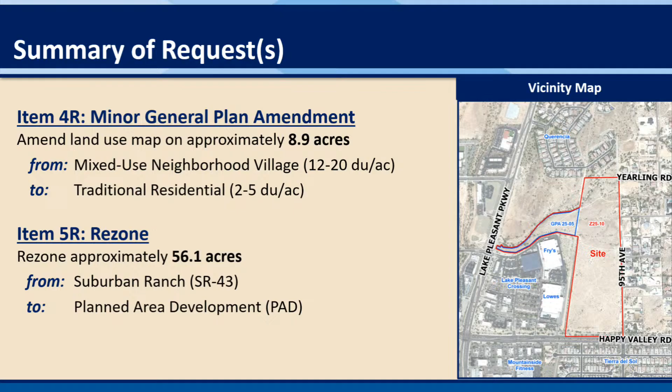If we dive a little deeper into the area context, we see that the site is located at the east portion of what's known as the Four Corners, at the intersection of Lake Pleasant Parkway and Happy Valley Road. Those 4 corners at that intersection also all happen to contain commercial uses.

The subject site is located behind that commercial center, Lake Pleasant Crossing, and is also nestled between residential uses to the north, east, and as you continue south beyond Happy Valley Road. Other items to take into consideration for this area context: there is a mix of density surrounding the site, which ranges greatly from 1 to over 20 dwelling units per acre, as well as commercial uses. Being in the midst of all of that, the subject site is a prime example of what is known as an infill development or an infill lot, because it's between all those variety of uses.

As mentioned earlier, this site was formerly owned by the Arizona State Land Department. It was auctioned off as a greater 72.7 acre site last year, and we'll see that in the next slide. One other constraint we'll also see is that there's an existing wash and a 60-foot wide gas line easement, but the next slide will have the depiction and the graphic.

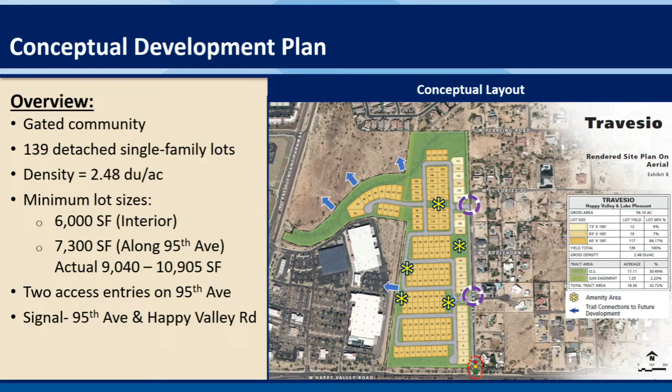There will be 2 access points to get to the site, both off of 95th Avenue. There will also be signal modifications at the intersection of Happy Valley Road, such as a chamfer and relocation of equipment, associated with road widening and the new geometry of the street.

Although the interior lots would allow for 1- and 2-story homes, those larger lots on 95th Avenue are going to have a 25-foot, single-story height restriction.

The proposed planned community is also going to provide over 18 acres of open space, approximately 33% of the site. That's more than double the required open space.

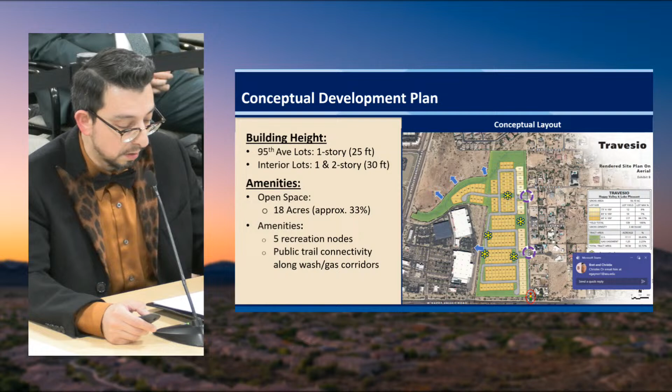Public access trails are being proposed to connect the development to the surrounding neighborhoods, amenities, and commercial uses. We see 5 recreation nodes, marked by bright yellow asterisks, that will be placed strategically around the development to serve the residents there.

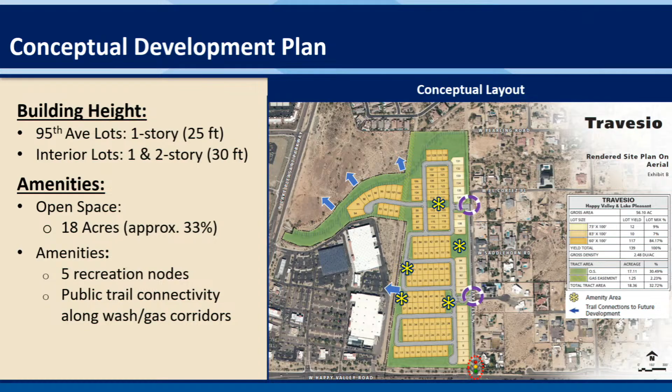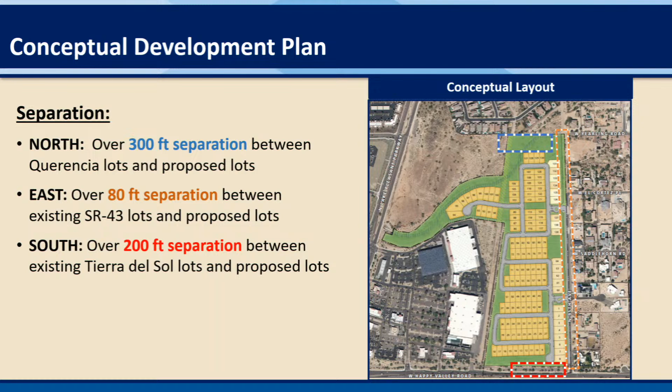The way the lots are laid out demonstrates physical separation from the adjacent neighborhoods. On the east, there will be 80 feet of separation from lot to lot. There will be more than 200 feet of separation from the lots at Tierra del Sol on the south, and over 300 feet to Querencia lots on the north.

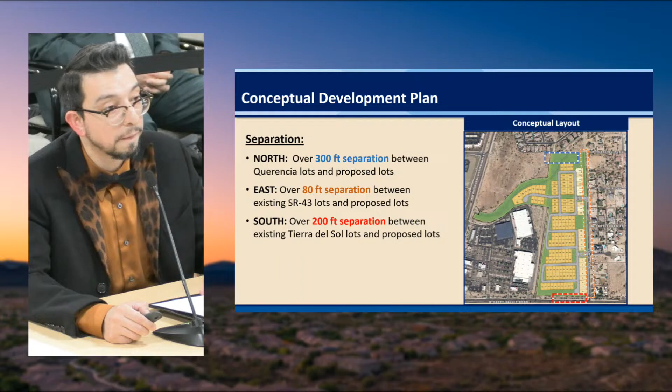Now that we have a general idea of what is being proposed, let's get into staff's analysis of the requests.

As a reminder, we are evaluating 2 different proposals tonight, but the first proposal is only for that 8.9 acre elephant trunk portion, where you see the green line to where the blue line cuts it off. That's the 8.9 acre portion.

As we evaluate the minor general plan amendment, the reason for the change has to do with physical constraints on that site. That green area is a wash, which creates a separation, severing the overall development pattern of that designation. Although the map currently designates the gas line as the boundary for mixed-use neighborhood village there, it's more functional to utilize the wash that exists as the boundary.

Changing that designation would still retain the mixed use along Lake Pleasant Parkway while providing an infill transition from the commercial and 12-plus dwelling units per acre currently allowed there, transitioning to the 2.48 dwelling units per acre being proposed, which is on the very low end of what traditional residential allows, between 2 and 5 dwelling units per acre.

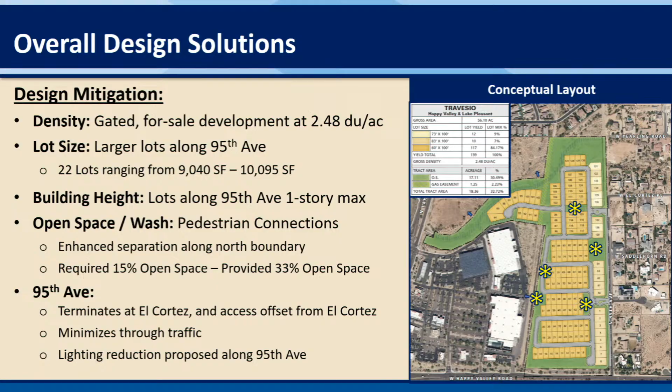Chair, Commissioner Cottrell, that is currently the termination of Yearling, just into essentially dirt right there. The city would be looking for that to be preserved as right-of-way, but ultimately no continuation of the street. So Yearling would continue in its existing condition, with no proper up-to-code cul-de-sac or anything constructed there. That's correct, there's no planned improvements for a cul-de-sac at that point.

Okay. And then on the lighting reduction proposed, could you give me any more information on what's being proposed? Is this required? Because I know that neighborhood to the east, those dark streets are a real benefit, and those lights would obviously be a concern.

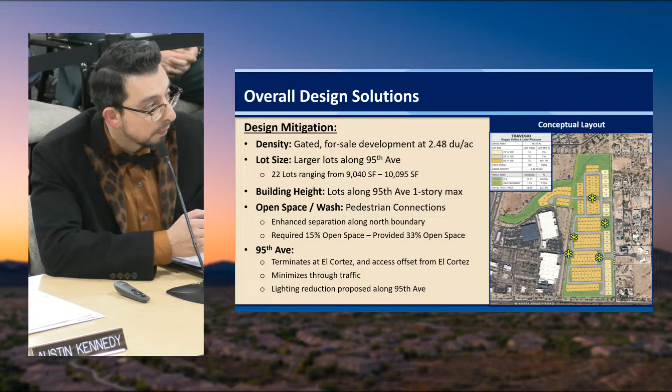Commissioner Cottrell, Madam Chair, so the discussions have been initiated as far as what the ultimate spacing criteria is going to be. That would be handled through the engineering waiver process. There are minimum safety criteria as well that would have to be adhered to. So that's still being refined as the proposal continues to be refined towards the development process.

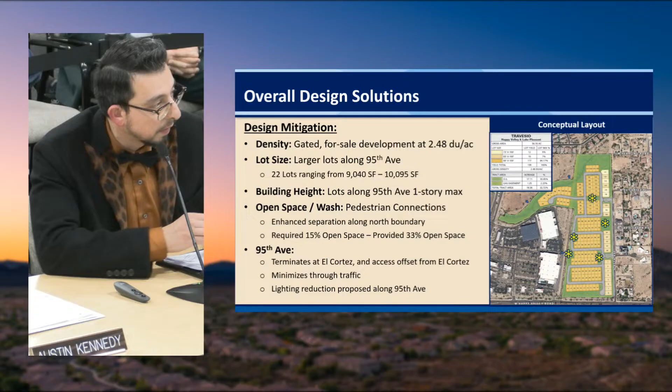Has city staff been open to that, shielding those lights and increasing spacing? Madam Chair, Commissioner Cottrell, if I could just add on to Mr. Valencia's statement, the applicant has approached the city about that, about seeking a waiver during the platting process. And the city is agreeable in principle to that. What that would do is, of course, not only will the lighting have to meet dark sky standards, but the waiver, if granted, would allow for a reduction in the number of lights and the spacing. So essentially, I think you're probably looking at two streetlights along 95th Avenue. Okay, and maybe some shielding so that light doesn't spread. Correct, that's right. Thank you.

Thank you, Commissioner Cottrell. Any other commissioners? I do have one more question, and I think that was regarding some of the resident comments from public outreach. Was there a traffic study done? Because traffic was one of the concerns. And I might have to address Mr. Kennedy or Plan Director Hawkes, whichever one.

Madam Chair and members of the commission, yes, there was a traffic study completed for this development. Okay, any key findings surrounding additional traffic or some of the concerns that residents had? Key findings would be that this is a relatively low trip generator and that capacity on 95th is adequate to support the traffic volumes. No significant impacts were expected at the signal.

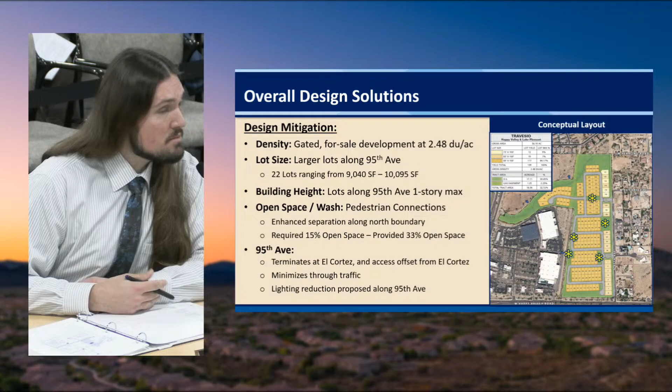But with some of those modifications, it seems that there will be regular flow of traffic, correct? Correct, traffic should flow adequately on 95th Avenue. The modifications to the signal are in response to other improvements that will be the responsibility of this development, including a westbound right turn lane, a southbound left turn lane, and a southbound right turn lane. So these modifications will widen the intersection slightly, requiring some additional traffic equipment.

Nice, okay, thank you Mr. Kennedy, that was my point of clarification. Do we have anything else, commissioners?

I don't think so. All right, what I'll do is go ahead and open it up. We'll have the applicant first. Sometimes I like to let the residents go first and then have the applicant, but since staff just presented, we'll flow as usual, have the applicant come before us, and after that I will open it up so that all of our residents have adequate time to address the commission on this case.

Thank you. Please introduce yourself and state your name and address for the record.

Thank you. Is this better? All right, should we give it a shot? Just go for it, I guess. Okay, good, thank you guys.

I appreciate your time. My name's Adam Baugh, 2121 East Highland Avenue. It's the first time to say a different address. I appreciate your time today.

As Elias was presenting, I was just ripping off sheets of paper that I was planning to present to you, and realized he did an excellent job, very thorough on what he shared. I think I'll only share two slides, and then I'll just jump right to the feedback. So Elias, do you control the presentation, or do I?

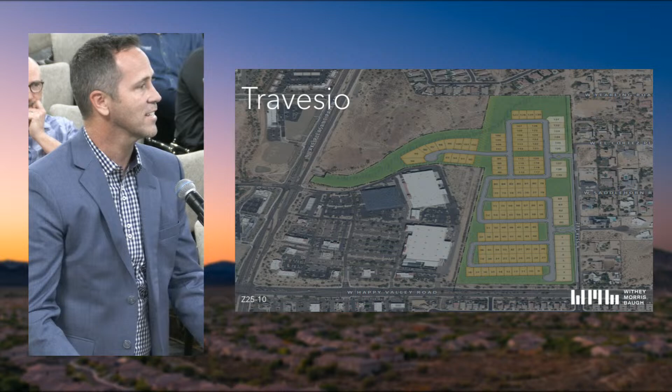I started practicing law in 2006, and I've probably done 500 to 1,000 cases over that time. Never, ever, ever have I done a case with as low of a density as this one right here. I was trying to think, when have I done anything less than 3.5 to 4 units an acre? For me to do 2.48 is something I don't know if I'll ever do again, but I am grateful to be here today.

I think part of it is the cooperation between three groups. One, the council member who gave us clear direction on what he didn't want to see in this area. Two, early coordination with the planning department before we purchased this land, before we won the auction at the state land department, on what they wanted to see. And three, a really cooperative development partner.

Most of my clients would stuff a far greater degree of density here, particularly right behind the Lowe's and Fry's shopping center, and I've been guilty of that on other occasions, trying to do a multi-story, multi-family project. To K. Hovnanian's credit, they knew what their market was. They knew what they needed to be successful, but not what they needed to be greedy. And they knew how to balance the narrow distance between the large homes to the east and the back of the shopping centers to the west.

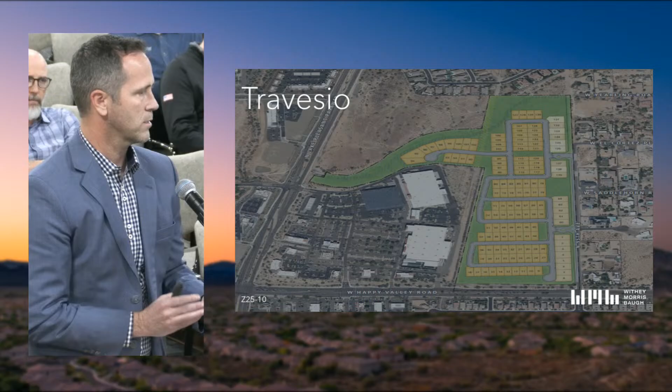So I'll walk you through just two slides real quick. This is the before general plan compared to the after general plan. I thought Commissioner Fighter pointed out something very astute. If I was to just multiply the number of 5 units per acre across the yellow area and 20 units per acre across the elephant's trunk, and if someone was to bring in a project, they could call it consistent with the general plan at 414 units. Not to say they would actually get the zoning, but just saying, if you apply the math of the density subscribed to those two categories, that could be a possibility without requiring a general plan amendment.

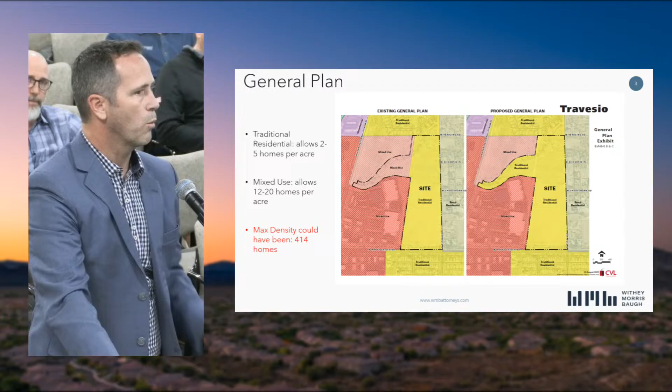What we're bringing in today is 139 units. And as you can see, as Elias presented, there's a very clear intention by the home builder to make sure he built something that was compatible in nature.

A couple things worth pointing out here. When you see the red box on the south, I went on the assessor's map today. Those lots are 50 by 125. Our lots in the middle, our smallest lots, are still larger than those lots to the south. Then I looked at the three Cadencia lots to the north of us outlined in that box. Those lots are 70 by 127. So our lots along 95th Avenue are actually even a little bit bigger than those two right there.

We cannot achieve a successful project given what you're paying for the state land department and executing this while keeping it at 1 or 2 homes per 2 acre lots like you see to the east. But what we did do was make sure we created something that was high quality.

We created housing diversity and paid respect to the context of the area. So what you'll see here is doubling the amount of open space, ensuring necessary trail connections so folks to the north and east could still walk and access through those trails and connect to the commercial shopping center, providing amenity areas for our own residents to enjoy and recreate in, and the ability to improve the streetscape without adding an unnecessary burden.

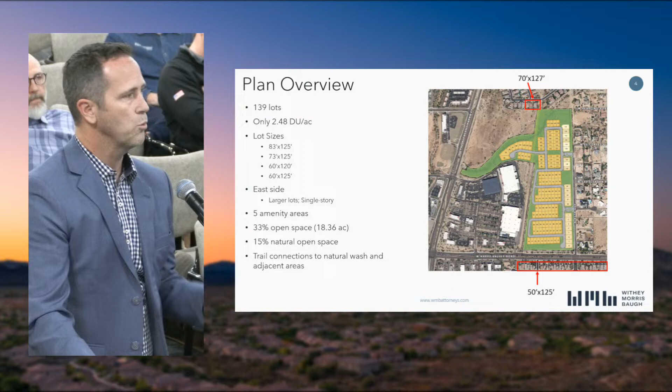So I'll jump right to the comments we heard. We did hear that this was considered high density. If only I could point folks to the last planning commission hearing, you'd get a real sense of what high density might look like. High density is typically above about 12 units an acre. To be only 2.48 is an anomaly, one that I haven't participated in the past.

Because our density is so low, our school capacity has no burden. We reached out to the school district. A gentleman named Mike Moss from the Peoria Unified School District provided an email back to us. He let us know that based on our units and numbers, it would anticipate generating 30 elementary students and 18 high school students at Frontier Elementary and Sunrise Mountain. That was really helpful for us, but more importantly, we did that because we heard the concern and want to make sure we addressed it.

We are fortunate to be north of Pinnacle Peak Road. What we learned in cooperation with the city is that developments north of Pinnacle Peak Road can actually apply for a waiver to reduce the lighting. If we were south of Pinnacle Peak Road, I don't think we would have had that opportunity. But as residents expressed concern about lighting in the area, we wanted to make sure we could achieve that, and after talking to the city, we've determined it is a possibility and we will apply for it.

A different concern we heard is about the grading. While the east half of this road was constructed by the city in respect of the neighbors, the west half hasn't been, and there was a fear that our development would force water over to the east side, particularly on the north end of our property. I'm grateful for the feedback from a couple of neighbors who gave me a chance to take a deeper look into this. As we considered what the civil grading would do, we were able to find a solution that observes all the city engineering requirements. It doesn't push any water east, but it takes on what they're obligated to do.

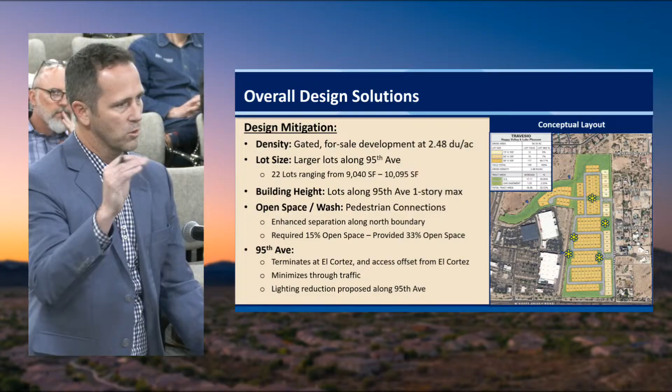Yeah, there's quite a buffer - I think it was 300 feet of green space to the north before we even get close to a lot. But those four yellow lots at the very end, there's no perimeter fence around the boundary of our project. Those four lots will just have their own backyard fence, which will be a half fence with a little bit of view fence on it. So we're not trying to wall ourselves in like a compound - we're just giving those four lots their own backyard fencing. That's it. And those lots will be much lower in height than the neighbors behind us, so they'll probably be looking into our backyards as opposed to the opposite way.

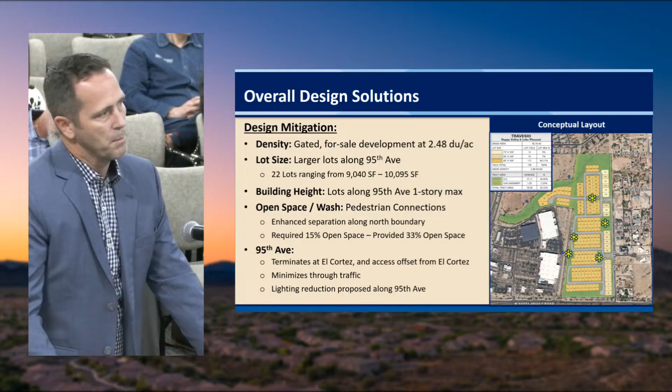When you think about what benefits - I'm sure somebody asked that question before they moved into their neighborhood and before their community was built. I guess the people before them probably thought, what benefit does it bring to have Cadencia in here, because it's a similar type of product. I think the benefit is people deserve to live in Peoria. They deserve to live here. It's a great community. They deserve to have good quality homes near retail shopping centers. If you think about trips, the ability to put homes next to a shopping center actually probably reduces the number of trips you'll be making across the valley, because you're just going closer to the shopping center next door instead of driving further away.

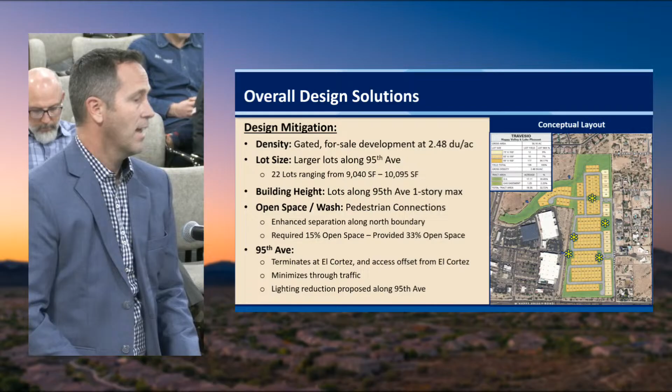But I think some of the bigger benefits here is we're doing much less than what somebody else would do. And if you had to think about the benefits, I would rather have this project than the unknown future, which could certainly be much more dense than what we're proposing today. I don't think there were any other questions. There weren't. Thank you so much, Mr. Bogg, and thank you for addressing those. I think that was sufficient.

What I'll do - I have just a comment before we move on, and then we'll move forward to a motion - is that I just appreciated how succinct but accurate the report was from the presentation from the developer. One thing that came to mind as we were going through a few closing questions is the unforeseeable future, having something that is very considerate as far as density, but then also thinking about our general plan, we think about smart growth.

I think this project, if I say so myself, would be smarter growth than a denser project that may be built there if this doesn't move forward. I'll open up for a motion, but I do like that this was a sensitive project because it won't strain the neighborhood as much as it could if another applicant wanted that same lot and wanted to do the max of what is allowed. This is just the thing about planning and zoning - this is allowed, and they literally went way below what they could have built. That stood out to me, and then also the comments about the trips.

There's a Lowe's, there's a grocery store right there, and so this also adds value because people would not have to travel that long. Traffic and the schools were my two concerns, and with that being addressed, I feel comfortable moving this forward.